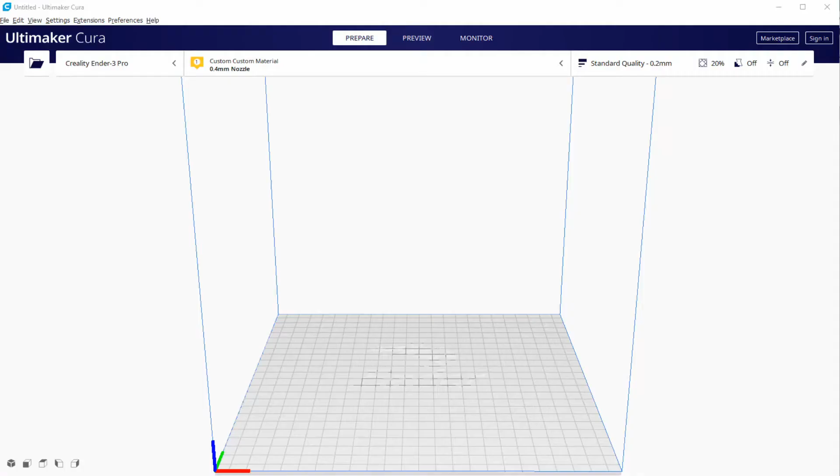So let's start by opening Cura and load the model. To create the blocker, first select the model. Click on Support Blocker and then click on the model to create the eraser block. Select the eraser block from the Object List menu. Select Per Model Settings. From the four options, select Modify Settings for Overlaps. From the mesh type, select Cutting Mesh. Select these settings and modify them to zeros.

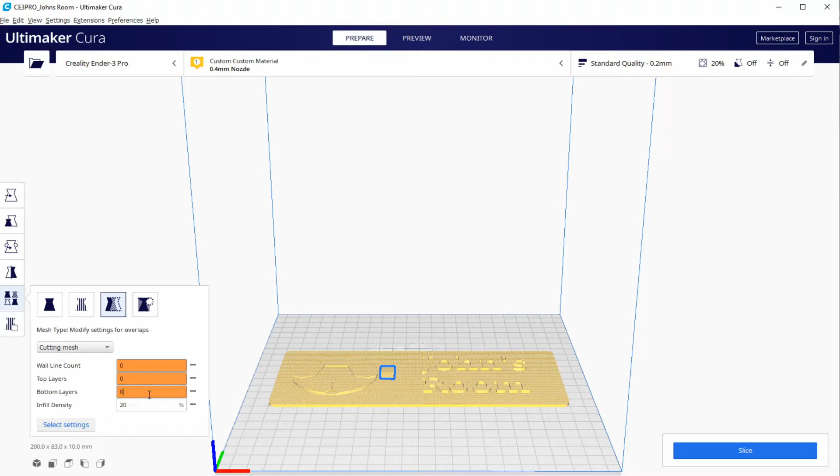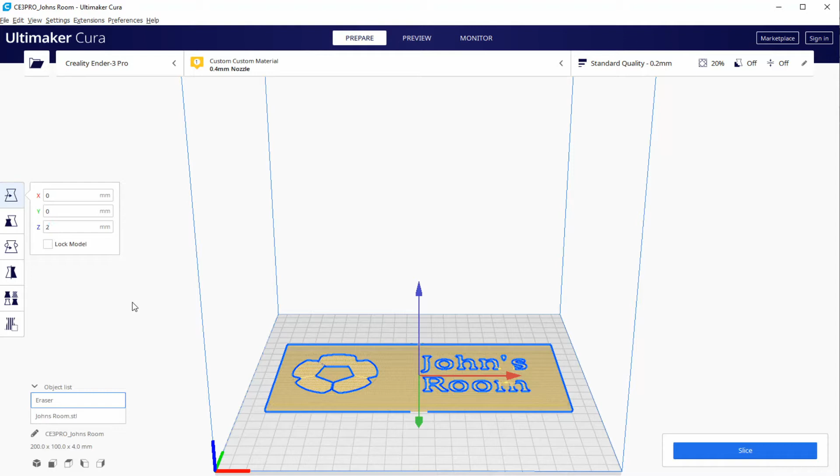Select the eraser, then Scale, uncheck Uniform Scaling, and set the values X 200, Y 100, Z 2. Select the Move option. Here select X 0, Y 0, Z at 2 mm. Let's slice it. And we see that only the back plate will be printed. Save this Gcode to the SD card and rename it One Green Backplate, so we know that it is the first print and the color is green.

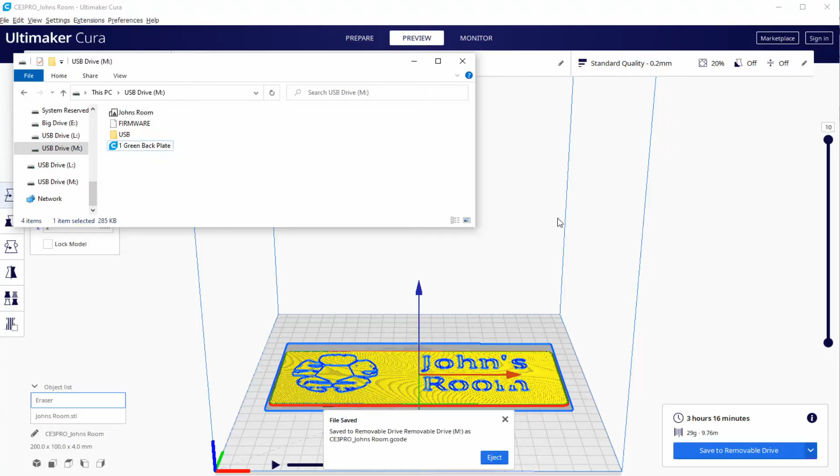Looking at the cross-section, we see that the eraser needs to be lowered to block the green backplate. And to be able to print the black portion of the soccer ball, we need two more erasers. One to block the white portion of the soccer ball, and the other one to block the text. Let's go back to Cura.

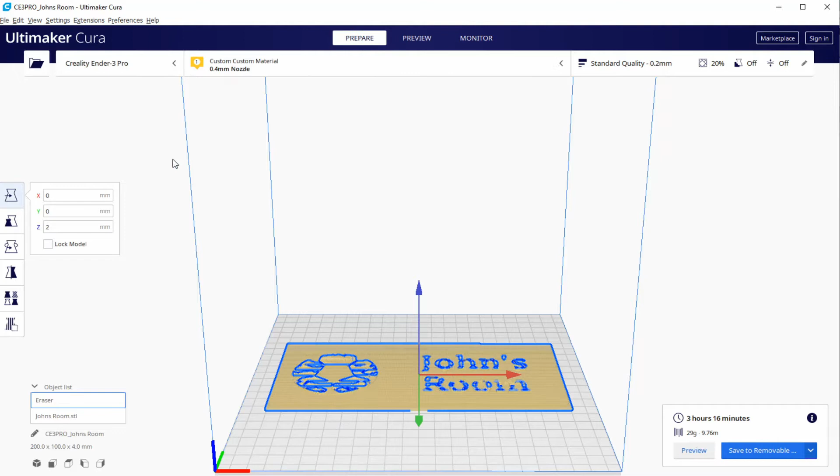Select Prepare and select the eraser, then move and make Z 0. Select the eraser, right-click and select Multiply Selected Model. This time the number of copies is 2. Now we have 3 erasers. We're going to use one of the new erasers to block the white portion of the soccer ball.

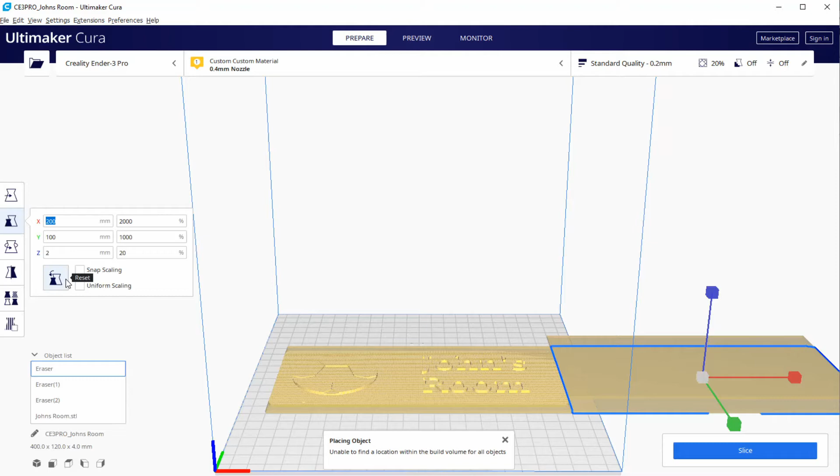First, select one of the new erasers, then select the scale X 100, Y 100, Z 1. And move to X 0, Y 0, Z 3. This brings the eraser to the center at height 3. With your mouse, place the eraser to cover the soccer ball.

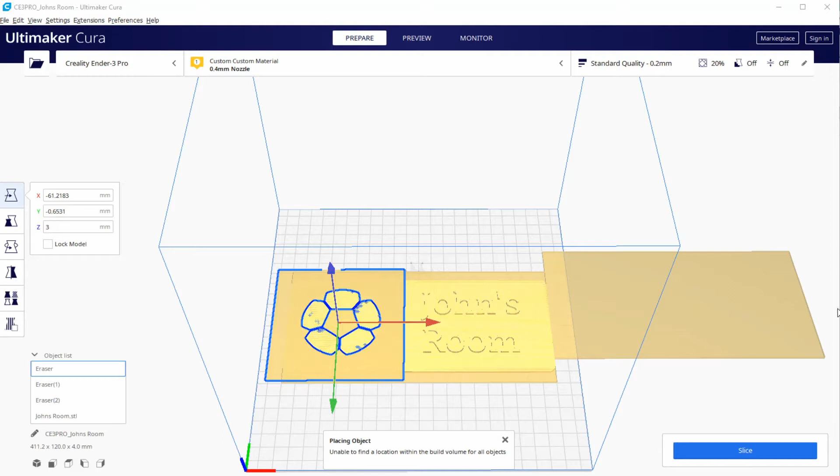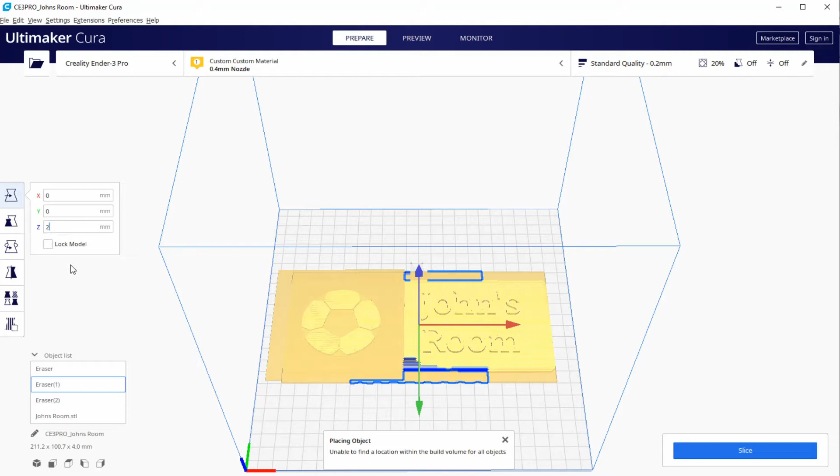Now let's use the other eraser to block the text. Select the other eraser, then scale X 100, Y 100, Z 2. Then move to X 0, Y 0, Z 2. This brings the eraser to the center at height 2. With the mouse, place the eraser to cover the text.

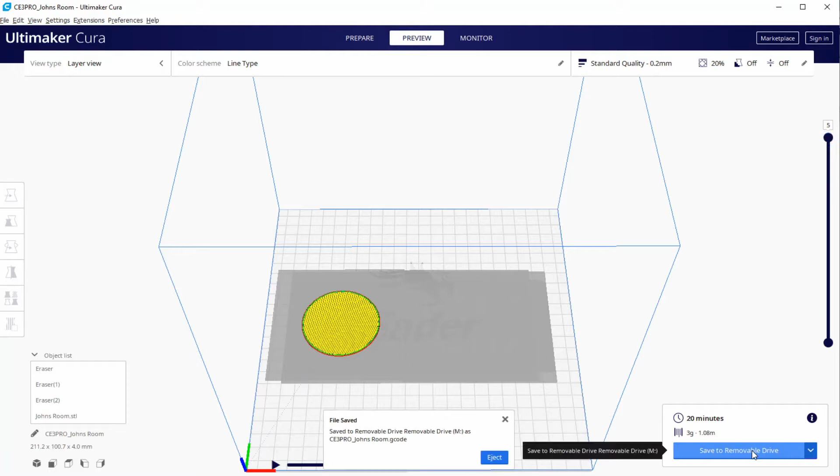When we slice the model, in preview, we should be seeing only the circle of the soccer ball. Let's save this new Gcode to the SD card and rename it to Black Soccer Ball. Now let's work on the white layers.

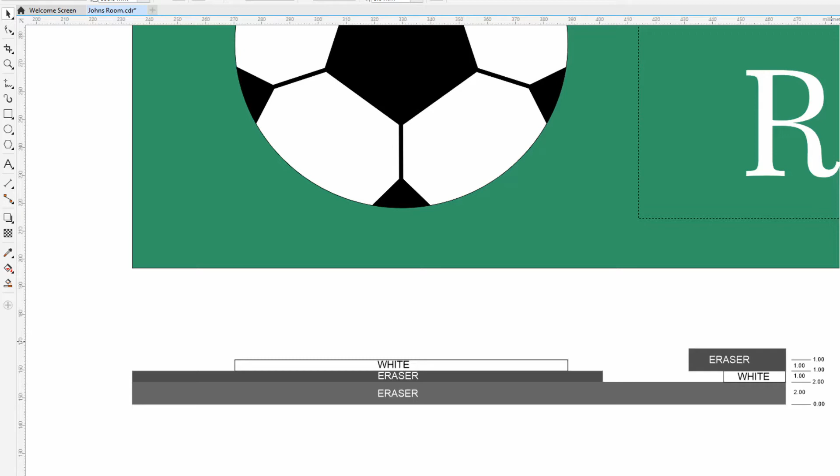In the cross section, we see how we want to move the erasers to see only the white parts. First, we need to move the eraser from the top of the soccer ball to the bottom of the soccer ball to block the black part of the soccer ball. And then move the eraser for the text to expose the bottom section of the text. Now let's do this in Cura.

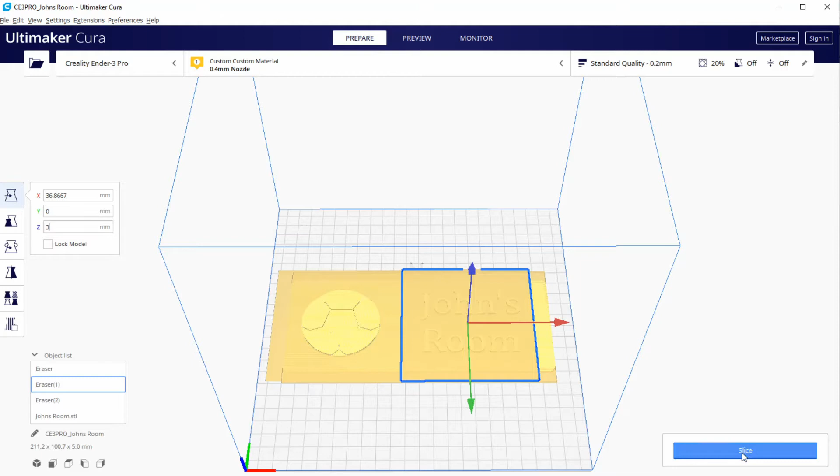First, select the eraser that is on the soccer ball and move it to Z2 to block the black part of the soccer ball and expose the white part. Then select the eraser on top of the text and move it to Z3. This way it will block only the top part of the text. Let's run the slicer again. Now we see that only the white layers will be printed. Let's save this Gcode and rename it 3 White Soccer Ball.

Great! Now it's time to work on the Gcodes to keep the bed hot between prints and to avoid the crash that happened in lesson 1. These are very simple and very important edits to the Gcodes. Let's select Gcode 1 green backplate and right-click to open it in Notepad. The only change we need for this Gcode is to keep the bed hot between prints while we change the filament, so we don't risk the print coming loose from the build plate if it gets cold.

Scroll down all the way to the end and look for instruction M140. We see that the good friends from Cura left us a note saying M140 S0, meaning turn off bed. We want to keep the bed on, so we need to cancel this instruction. Adding a semicolon at the beginning of the line will convert this instruction into a comment, which means the printer will ignore whatever comes after the semicolon.

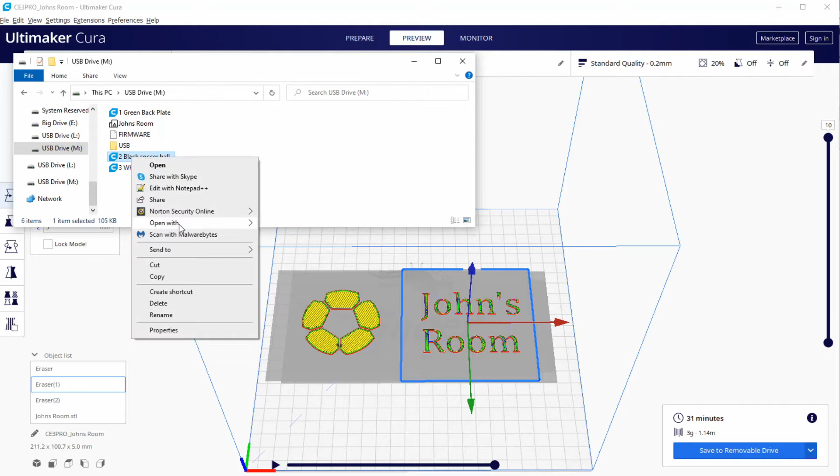There are 2 lines with M140 S0. Make sure both have a semicolon at the beginning of the line. We X out of Notepad and save the file. Make sure the file keeps the .gcode as the file type. Now let's work on the second Gcode. Open Gcode 2 black soccer ball in Notepad.

Some 30 lines down from the top we'll find layer count and layer. Let's add 3 blank lines just above layer count. This is where we will add the instructions to avoid the crash that happened in lesson 1. We will change the path of the extruder. Instead of going in a straight line from the origin, we will make it go up first, then horizontally just above the print starting point, and then down to where it should start printing.

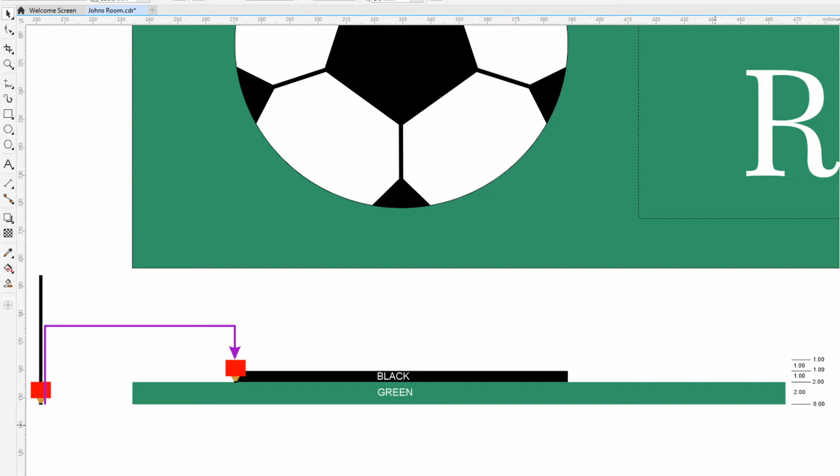To accomplish this, we'll use the move instruction G0. 4 lines below layer count, we find a line that starts with G0, F something, X something, Y something, and Z 2.2. This instruction means that the nozzle will move from wherever it is to these XYZ coordinates in a straight line. The F means the speed of the move.

At this point in the Gcode, the nozzle is near the origin 0, 0, 0, and if it moves to these new coordinates, it will go in a straight line and it will crash with the green backplate that we just printed. Copy this G0 line and paste it twice in the extra spaces that we just created. In the top line, we delete X something and Y something, and for Z, we change the value from 2.2 to 5. This will make the nozzle go up to the 5 mm height.

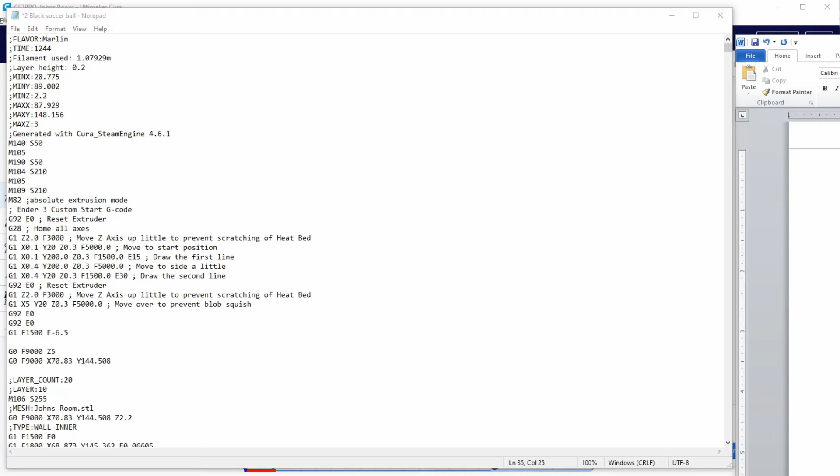Then in the next line, we delete Z 2.2. This will make the nozzle travel in a horizontal straight line at height 5 mm to the XY position in the second line. And then it will go down to Z 2.2 and start printing. Now we have to repeat the add semicolon to the M140 instruction at the end of the Gcode like we did with Gcode 1. Save this Gcode.

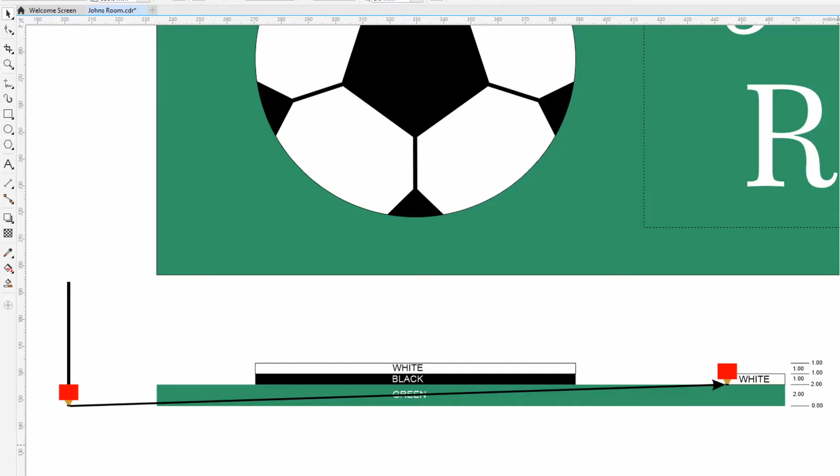Now let's open Gcode 3 white soccer ball in Notepad. We do the same instruction to avoid the crash. Copy and edit the crash avoiding instructions, but this time, since it is the last print in this project, we do not do anything with the M140 instructions because we want the bed to turn off. This is the original path of the nozzle, and this is the new path after editing the Gcode, where we go over the black ball and then down to print the white text.

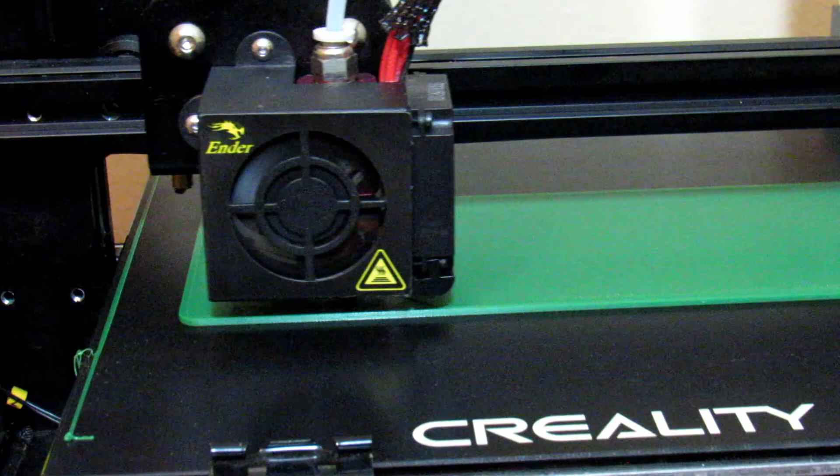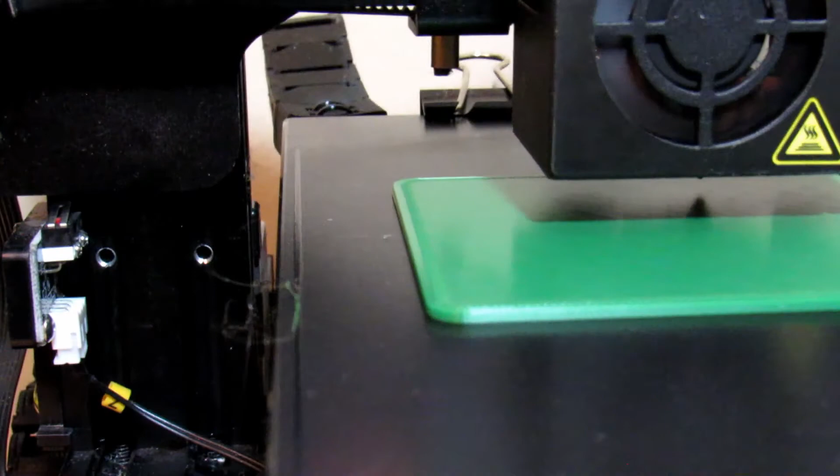Now let's print it to see if what we did actually works. Load your first filament, in this case green, and print Gcode 1 green backplate. It will take about 3 hours to print. Remember that once it finishes printing, the bed heating will remain on. Change the filament to black and start printing. Here we see the nozzle go up, then travel in a horizontal line to the starting XY coordinates, and then down to start printing.

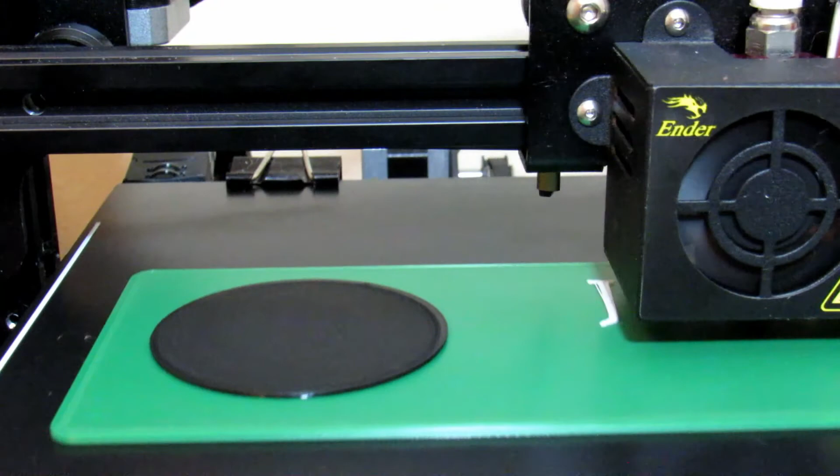When the black layers finish printing, change the filament to white and print Gcode 3 white soccer ball. We see that the nozzle goes up and travels to the starting point without crashing. Uh-oh, this is not good. The white filament is not sticking to the green. I was planning to show you that this may happen in future lessons. Since it did happen here, let's talk about it now.

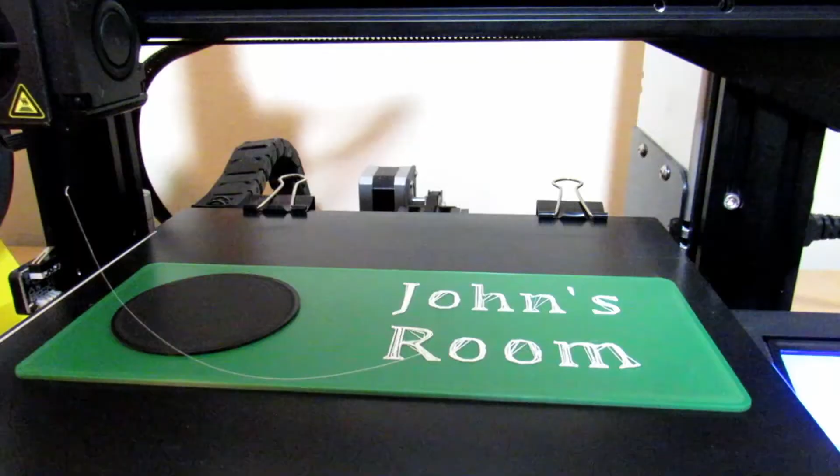What is happening is that the gap between the nozzle and the previous print is a little too big, and it is not pressing the filament against the previous part. Thus, it is not sticking. There are a number of reasons why this happens. It could be the filament type, the temperature, maybe it has to do with the calibration of the E-steps, or flow rate, or it could be something else. It doesn't matter. The print can be salvaged, and I will show you how to prevent this from happening.

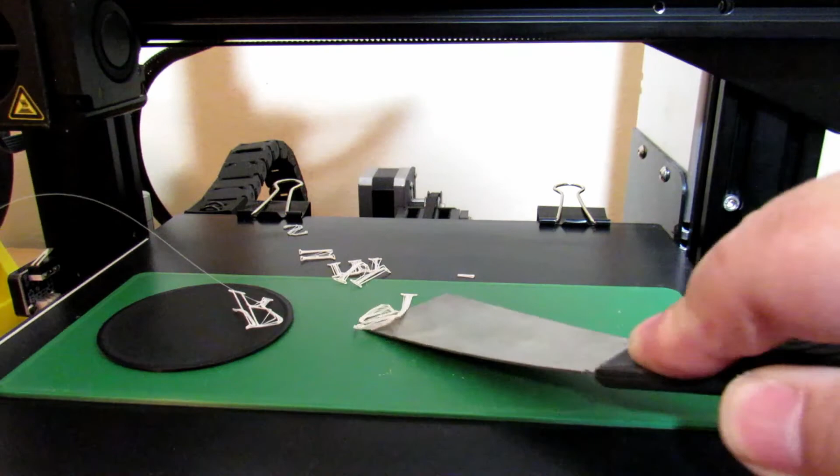First, stop the print and carefully remove the trouble print. Don't forget to keep the bed hot. Don't worry about some marks left behind from the failed print. The new print will cover those marks. Let's go back to Cura.

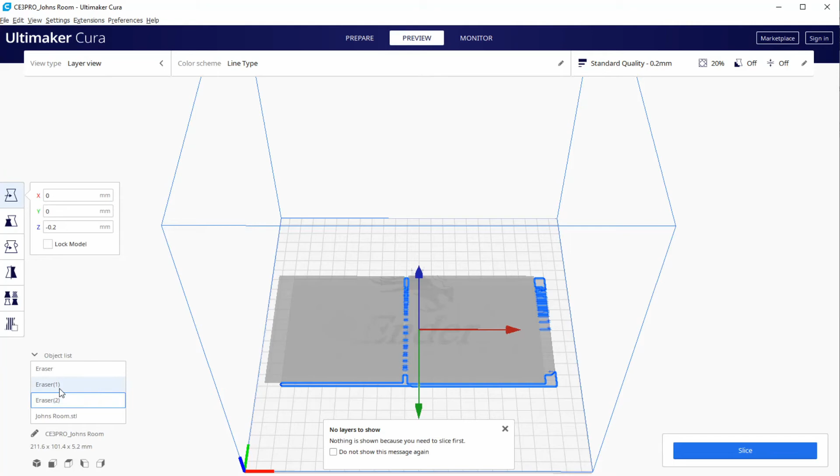In CHEP's video about using pause at height for multicolor printing, he mentioned that in order to promote adhesion to the new color, he likes to redo the last layer of the previous print. This means that the new color will start printing at the same height as the last one. In other words, it is creating a kind of interference between both prints.

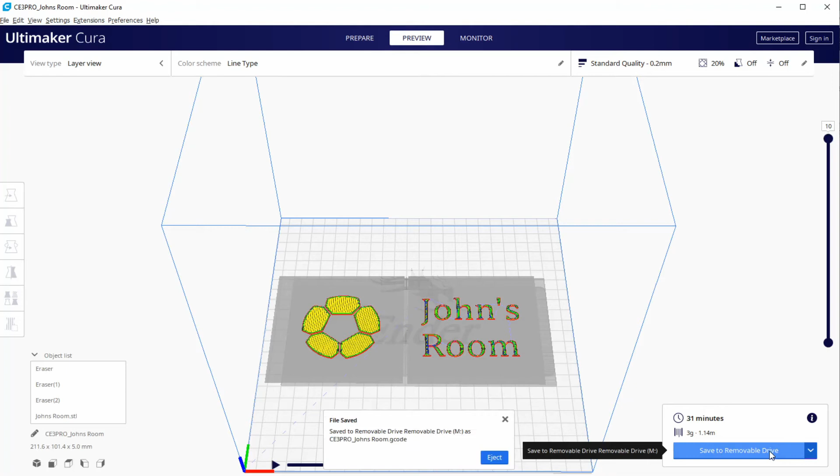To create this interference, we need to lower the white layers by 0.2 millimeters. To do that, select the model and move it from Z0 to Z minus 0.2, and lower all the erasers by 0.2 millimeters as well. Slice it and save it to the SD card. Rename the Gcode 3A white soccer ball to have a different name.

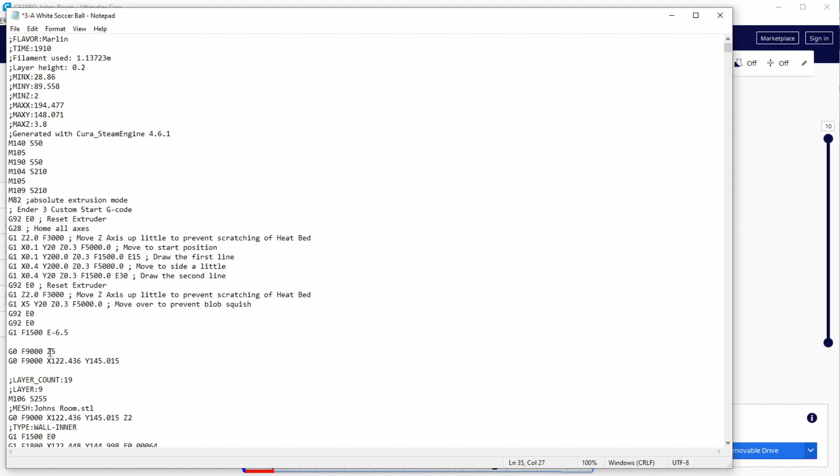We have to do the same edits to the Gcode as before to make the nozzle go up, then travel in a straight line, and then down to start printing, avoiding crashing with the previous print. So we add the 3 blank lines and copy and edit the move command lines. One to make it go up, and the second one for the travel in a straight line to the start printing point. We go back to the printer and print this new Gcode.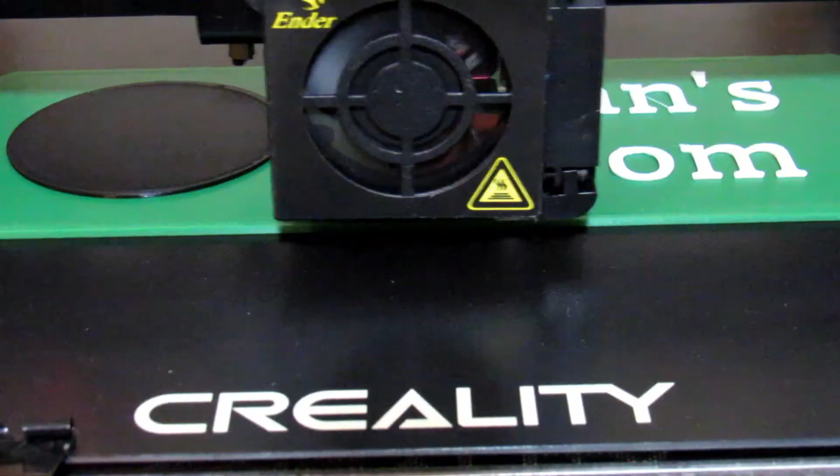And we see that the print is coming out the way it's supposed to, which means that the interference works in promoting the adhesion between different prints. Let's see the transition from the text to the soccer ball. So far it looks good. We see that the first white layer on top of the black looks kind of thin. This is actually good. It means that the white filament is being pressed against the black layers, promoting adhesion.

Now that the print is finished, let's compare it with the print from lesson 1. First we see that there is no line where the nozzle crashed in the previous print, and the text is white without the black bottom. You can see that the black part of the soccer ball is at the same height as the white text. This cannot be done using the post height method. In the next lessons, we'll continue expanding on this technique.